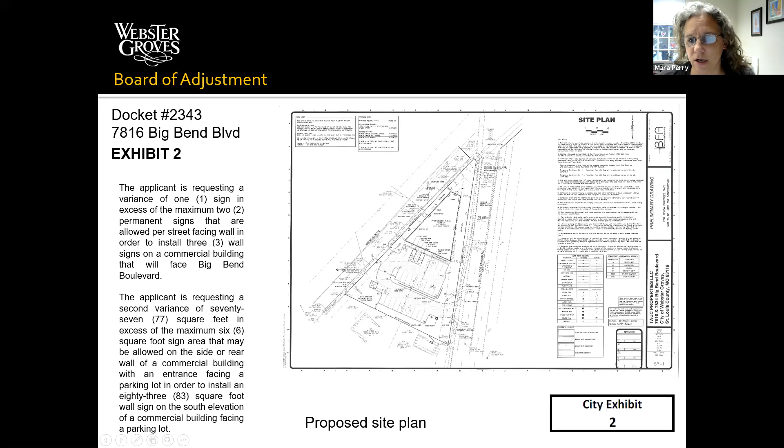And yeah, I think you've just done it again, but just for the board's review, there's actually 2 different variances requested in this application, is that correct? That is correct. We have both of the variances requested on the side of the slide: the first variance regarding the additional sign, and then the second variance regarding the additional square footage for another sign.

Thank you. At this time, Madam Chairman, the city would move the introduction of evidence, all the exhibits that have been testified to by Webster Groves, and have nothing further to present at this time.

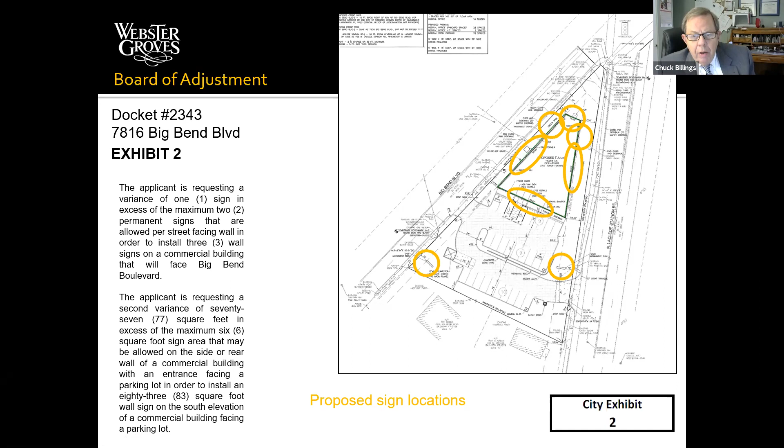No, that's incorrect. We gave you the generic one because you have to use the script over and over again, seven times. So I do need to go through all the description of the 2 variances that they're requesting. Please do.

So I'm going to describe for you this evening what the proposal is, what the proposed signs are, what we were able to approve in the code, and then I'll go through what they're requesting for the 2 variances.

Circled in yellow are all the proposed sign locations on this piece of property and on the building itself. As you go through the analysis of what they are allowed to have on the wall elevation, in this case both the north and west elevations, because there are only 2 frontages and because of the orientation of how the building faces, we consider the frontage of both the area of the wall that faces directly onto Big Bend, as well as the area of the wall that faces towards the intersection, as one facade. In looking at that as one facade, they are asking for a sign that faces the area that goes towards the corner of the primary part of the intersection.

They are also asking for 2 additional signs on the actual facade that is immediately parallel to Big Bend. In addition, on facade B, which is the facade that faces North Laclede Station Road, they are asking for 2 signs, which is what is allowed per the code, along the eastern elevation of the building. In addition, on facade C, which is the south elevation, this is the elevation of the building that faces internally to the parking lot on the property and faces towards what we would consider the side of the property.

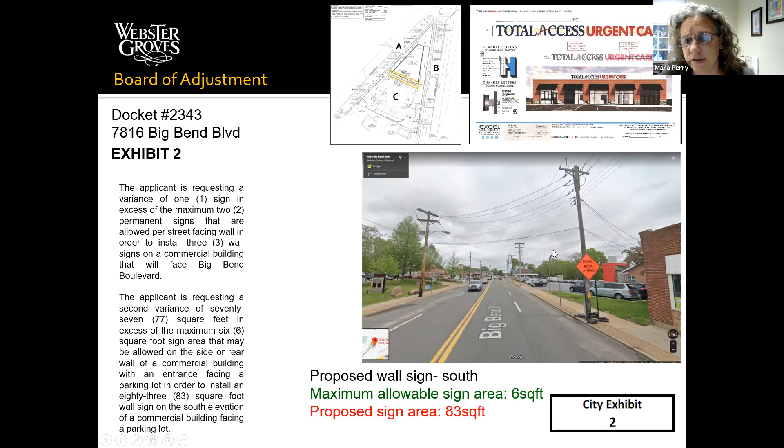This again is looking along the facade. This street view is along Big Bend, but from the back side, you would have a back-facing elevation that's a little bit closer in, not as far as this red area here. Both this structure and this brick structure have both been torn down. There will be a parallel elevation here that has 2 signs on it, and there will be a monument sign facing the street here.

We do not have any additional information to share with the board, but if there are questions regarding the request for those 2 separate variances, I would remind the board that each will be voted on separately. For each, you first have to determine if it's a practical difficulty or unnecessary hardship resulting in something inconsistent with the general purpose of the ordinance, whether for the 3rd sign facing one frontage, or the 77 additional square feet above the 6 square feet allowed. Once you make that determination, you also have to decide if that hardship or difficulty means the proposed sign will do any of the other 3 items listed on the screen. I am available to answer any questions.

All right, I turned my video off to save battery power. So what we're talking about is essentially 3 signs on the building and 2 monument signs. Actually, no — the proposal is 6 signs on the building and 2 monument signs. They are technically only allowed 5 signs on the building, and one of those is one of the variances they're asking for. Of the 5 signs allowed, one is limited to only 6 square feet, and they would like 83 square feet. Does that help with the clarification?

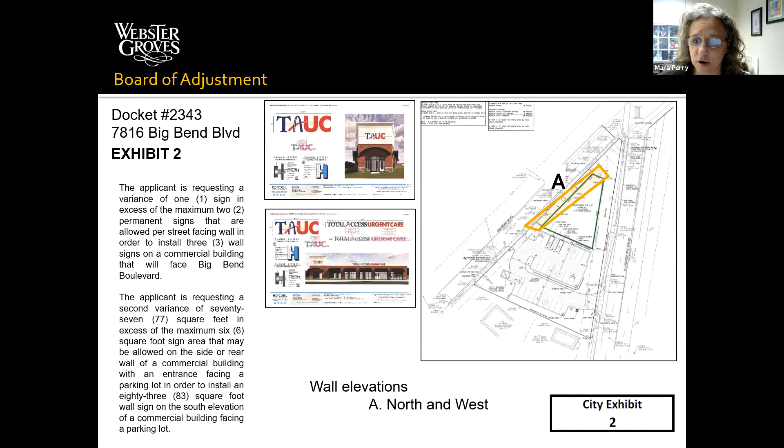That would be the question for the applicant. I can answer additional questions regarding what it meets or doesn't meet in the code, and our analysis of why we did not allow either of those. I would like the analysis, but if you want to wait till they present, I can ask afterward. Well, what's the question? I did go through the various analysis of what we did determine — that's why they're getting variances.

My question would be about that sign on the small wall. Basically you're considering it as 3 signs facing each of those streets because it's sort of oblique, so it can be viewed from the street as well as the ones that actually face the street. Technically there are only 2 streets, so there's not a third street to come into play, even though this is an unusual intersection. To determine which direction these facades faced, the building has 4 faces, but the intersection and lot only have 3 sides. Using those 3, we could have said the building faces Big Bend with 3 signs, or analyzed it as 3 signs facing Laclede Station. Either way, you're looking at 3 signs facing one street or the other — there's no third intersecting street, because only the 2 streets intersect with one another.

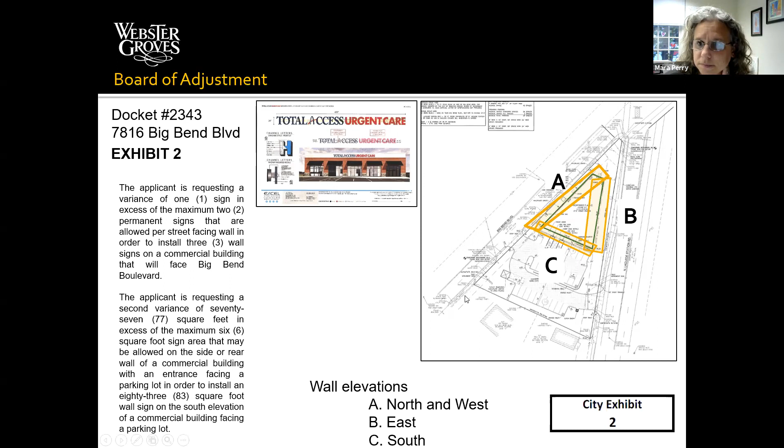Are there any more questions from the board for Mara at this time? No. If not, who is here in favor of docket 2343?

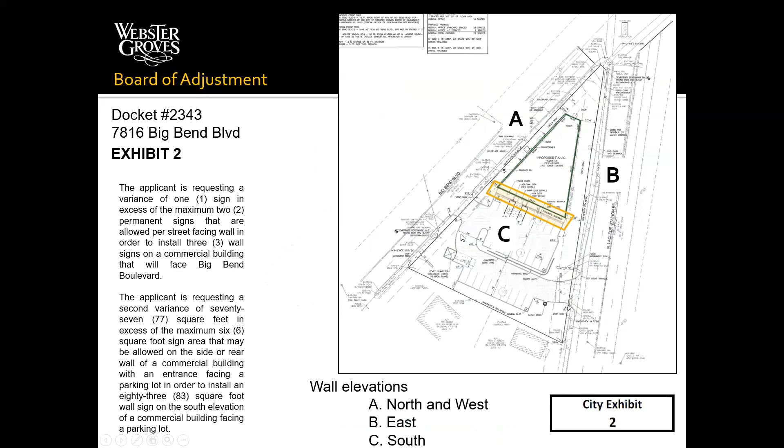As for the back of the building, the same premise applies. Given the nature of this building - thank you, Mara, you're reading my mind - as you're passing, going south to north on either angle, passing the building from the C side first as she's written up there, you have the opportunity to see those two monument signs.

But my concern is with the grading on the property. Those of you familiar with this area - and I imagine you're all similarly familiar, if not more familiar than me - the monument signs are at or actually below the level of the street. With this intersection having as much traffic as it does, there's potential for those signs to be obstructed by other cars.

With the building standing higher, that wall with the proposed sign - I think that wall is about 22 feet high - would provide a non-obstructive view, so it wouldn't actually make it worse for people driving there as far as sign clutter.

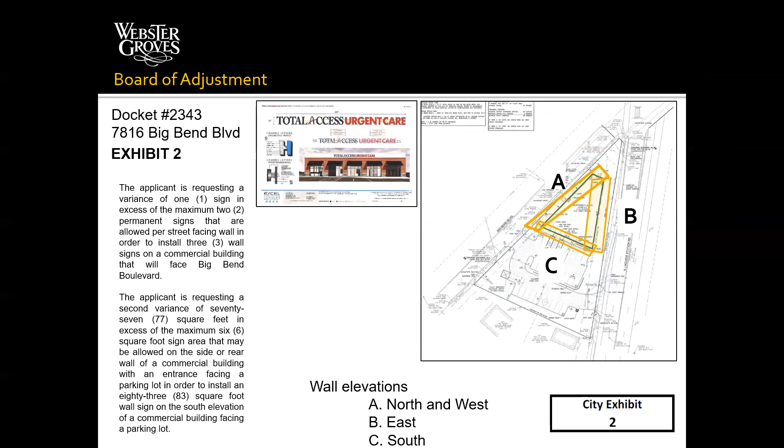Well, can we back up to that first picture of the actual intersection? Because it seems to me, yeah, that one - this one - even if you do have a sign, it's somewhat obstructed by all of those wires and poles going in. I'm not quite sure, are they planning on moving any of that? I mean, that all stays put.

I believe - Mara, you may know more about this from the city's perspective - that the county roadways is actually making an improvement on that corner. They may be removing one of those poles, though that's not from our project scope, but I believe there is some change occurring. From experience, when I've proposed removing as many wires as there are there, it typically ends up being $500,000, which is jaw dropping for everyone. But in any case, I'm hopeful, and I believe they're removing at least one of those, which opens up a bit of a signage window and would improve our visibility somewhat.

So Joe, I have a question for you related to this sign on the triangular facing, fascia of the building, at the peak there. If that sign was there, isn't it viewable from both angles of approach, both from Laclede Station and Big Bend?

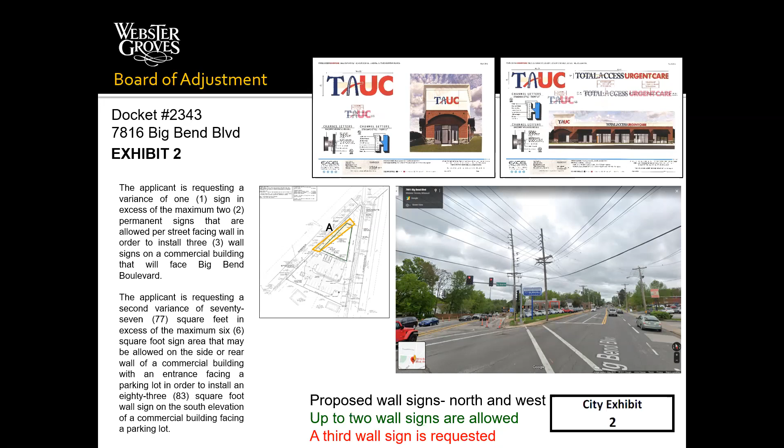Sure, and actually your point is well taken. I just want to make sure I'm following the appropriate cadence here. Maren, are you comfortable with where we stand right now? Sorry, we really need to get back to simply—you're making testimony, they're asking questions. Just for clarification, it's my understanding there will be time for board members to discuss amongst themselves after the testimony closes, is that correct? Correct. Once we go into executive session.

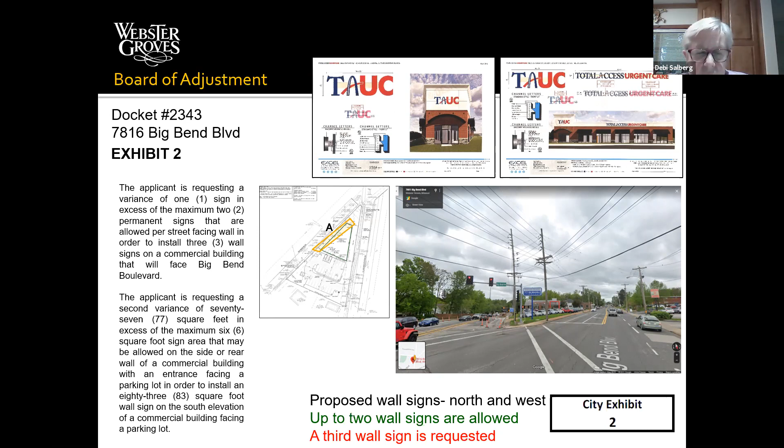So let's talk about the wall sign on side C, please. Sure, sounds great, thank you. All right, so in any case, our goal in making this one and in requesting this...

is to provide a more vertical option for when those monument signs are blocked by traffic or blocked by another car that might be sitting and waiting for the light. And so having that, as well as having branding over the front door to the building, which is closest to the parking lot where our patients are going to be, is effectively that.

And I'm concerned with the monument sign positioning. We couldn't find a better spot because closer to the intersection was continuing to further obstruct traffic and potentially line of sight. But with the grading of the site, I have some residual concern that those monument signs may not always be visible for people passing by and looking for that turn in. So the signs on the building offered a more elevated opportunity for them to see that without driving by and missing a sign. So I think that's all I have there.

So we can do whatever is next on the cadence here. Joe, thank you, I have a question for you.

Do you guys have data on basically the radius of the people that use your facility? I know the name of your facility, and there are several located within pretty decent proximity of this location. So I'm trying to figure out how far are people coming to access your location—are these generally local people, or are they traveling from somewhere they may not be familiar with the local area? That's a good question, because my answer has evolved since the last couple of years allowed us to expand farther into St. Louis. When it first started, people would drive 5 to 10 miles on the highway to get to us because we were further spread out.

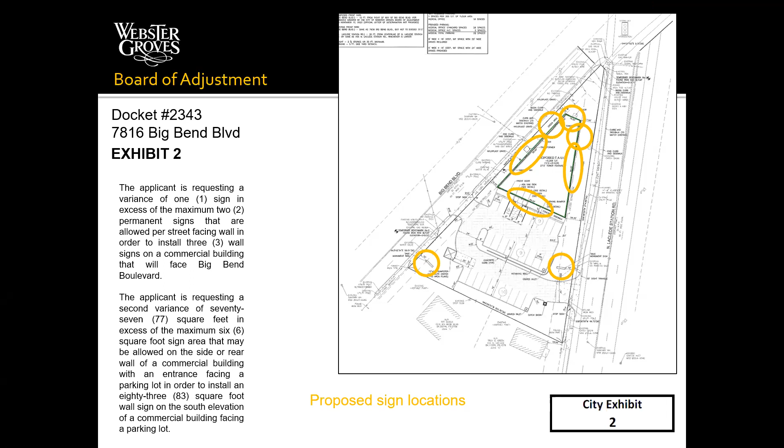Well, I would argue that there is a hardship. I think that lot is particularly unusual. Coming toward it on Big Bend, you can't see anything. If you're looking for an urgent care, I'd like to know where it is. I don't find it gaudy, and I don't think it's bumper stickerish at all. It's very reasonable to figure if that was a square building, there'd be a sign there. That doesn't bother me, I think that one makes sense. I have some issues with the back, but I understand their point clearly on the front of the building. So I'll give you maybe the corner, but I still don't think it's going to be as visible as you think. But when you put it all the way around the corners and throw in 6 other signs, it just seems like overkill. I guess that's where we're going to differ, and that's fine.

No, that's all right, I'm not mad about it or anything. No, nor am I. I just see it a little differently than you do, and I really do get your point. I take it, but I can also see the other viewpoint as well.

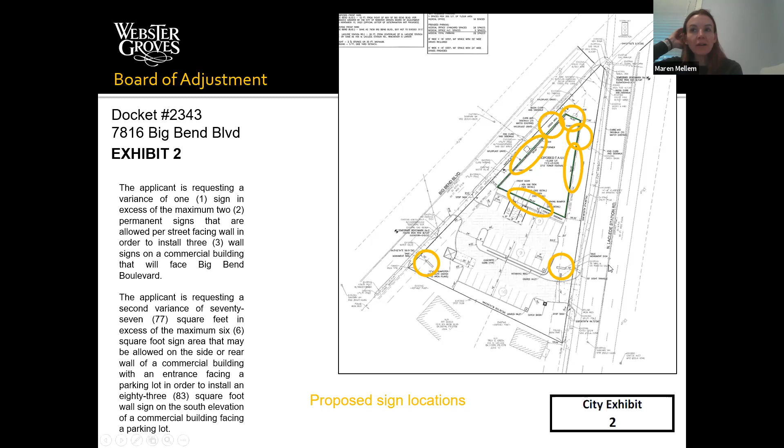Mark, can you flip to the standard of review again, please? The practical hardship. Thank you.

Me just being perfectly honest, I don't think there's any undue hardship on either one. Practical difficulties, unnecessary hardship, or results inconsistent with the general purpose of this ordinance, or the aesthetics or the intent of the building.

In the interest of time, since we have 6 more of these, does anybody else have any comments? Anyone have any comments on the sign on side C that they haven't mentioned? I'd like somebody to at least address some of that undue hardship, just so we have it on record. Whatever the vote turns out to be is fine.

I mean, do we need to talk about them separately or can I combine them? We'll have to vote on them separately, but you can talk about them together, that's fine.

I guess I'm leaning towards, I could see how it's not their preference or not ideal for marketing and branding purposes, but I don't see it being a practical difficulty or unnecessary hardship. There seem to be more than enough signs to adequately cue eyes into seeing the space. We heard testimony that their average patient is coming from within a few miles, so it's more than likely a person who passes that intersection and is very familiar with where they're going. It's unlikely to be someone just driving down the street looking for an urgent care, since they're within a few miles. I don't see that they're helping their patients that much with it. I guess that's where I'm leaning.

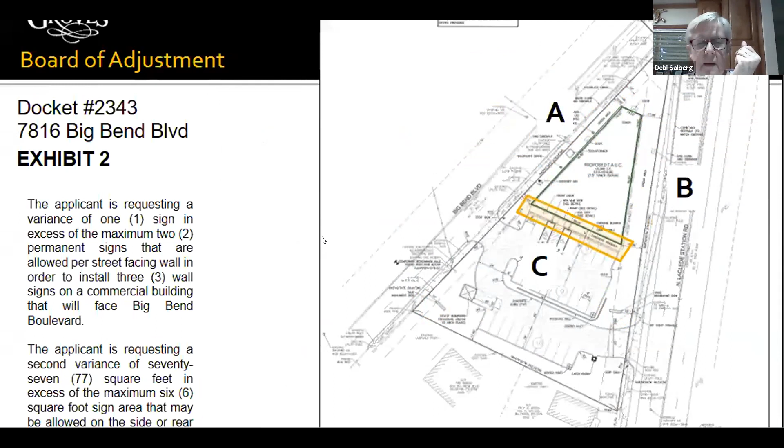This is docket number 2344, a petition submitted by Donald and Deborah Fitzgerald for an application for variance from section 53196B of the zoning code of the city of Webster Groves. The applicant is requesting a variance of 2 feet in excess of the maximum 4-foot fence height allowed in a front yard in order to install a 6-foot tall fence of approximately 20 linear feet located in the north front yard of the subject property. The property is located at 901 South Gore Avenue within the A3 10,000 square foot residence district.

And Chuck, would you like to present the exhibits? Does the city have a case? Yes, Madam Chairman. At this time, the city would move the introduction to evidence of the exhibits which have previously been provided to the board. They are numbered 1 through 10, and some of them have separate parts. With that being said, I would move the introduction to evidence of all the city's exhibits and would present the testimony from the city staff.

And we will start with, would you please state your name for the record, Danny? Do I need to be sworn in first? Yes, Danny. Yes, would you please raise your right hand? Sure. Do you solemnly swear that the testimony you're about to give is the truth, the whole truth, and nothing but the truth? I do. Thank you. Please go ahead, Mr. Billings. Thank you. Would you state your name for the record, please? Danny Gendusa. And you are employed by the city of Webster Groves, is that correct? Yes, I am. And in what capacity are you employed? As planner. What are your duties in that position? To administer and execute zoning regulations.

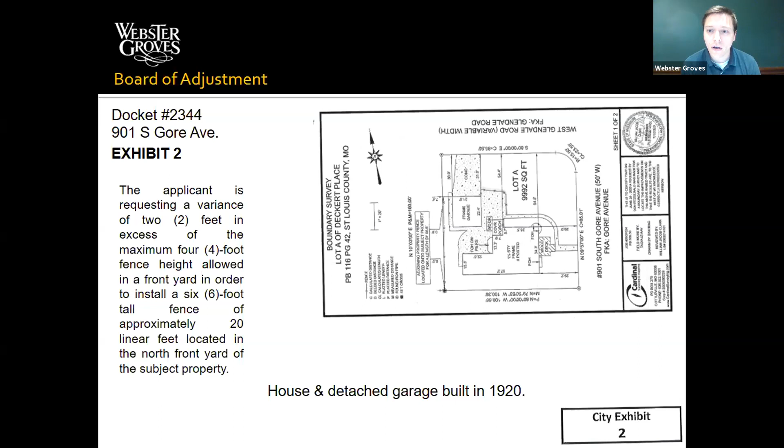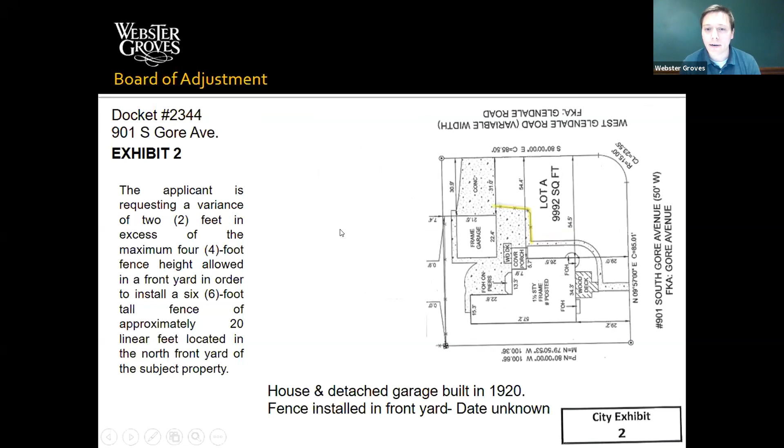Can you describe the existing conditions on the property? Yes, so 901 South Gore Avenue is a corner lot. It is located at the corner of South Gore and West Glendale Road. The house and the detached garage were built in 1920. There was a 6-foot tall fence installed in the front yard, kind of highlighted in yellow on the slide. The date of its installation is unknown. We don't have a permit record for it, or I was not able to find one.

Okay, do you have further exhibits to present, Mr. Gendusa? Yes, so the applicant has been doing a number of other home renovations, and at this point they're wanting to replace that fence that was hit by a drunk driver. They applied for a fence permit to install a 6-foot tall panel style fence, a different style than what they had before. Staff told them, unfortunately, we couldn't approve it because you are not allowed to have a 6-foot tall fence in your front yard.

But we told them that there actually is a code exception that would allow limited fence repair if you're looking to do the same material at the same height and in the same location as the existing fence. It can be deemed a repair according to our code and can be done without a permit. So even though we couldn't approve their 6-foot tall fence in a different style, we could technically approve them to replace it with the same kind of 6-foot tall wood shadow box style that they had previously.

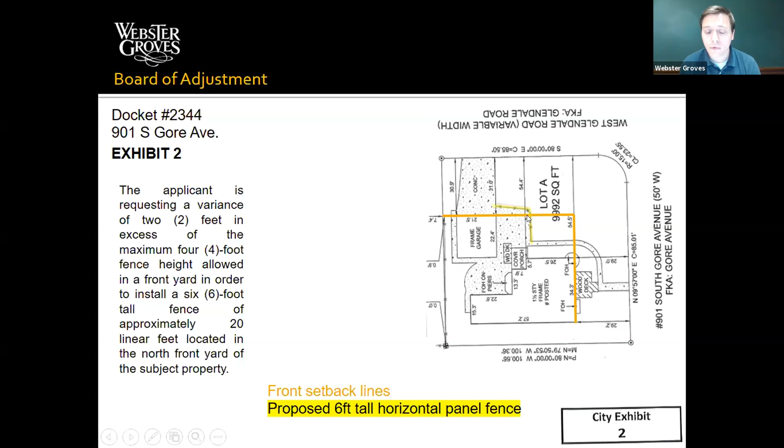And this is the type of fence that they wanted to install, different from their shadow box style — it's a horizontal panel style. I don't want to confuse it too much, but if the Board of Adjustment were to approve the applicant to have a 6-foot tall fence of a different style, this style would still have to go to the Architectural Review Board for a separate approval. But this is the style that the applicant would like to put in.

And as the slide shows, any new fence other than the 6-foot shadow box they previously had, located north of the front setback line, would have a maximum height of 4 feet. And any fence that they would install in line with or behind the front setback line could be allowed at 6 feet in height.

That's the sum of it. I know it's a little bit of a unique request, so I'd be glad to take questions.

Any questions from the board at this point? At this time, Madam Chairman, the city would introduce into evidence each of the exhibits that has been presented to the board through its packet and as testified to by the city. With that said, the city would have nothing further to present on this application. Is there the applicant available to speak?

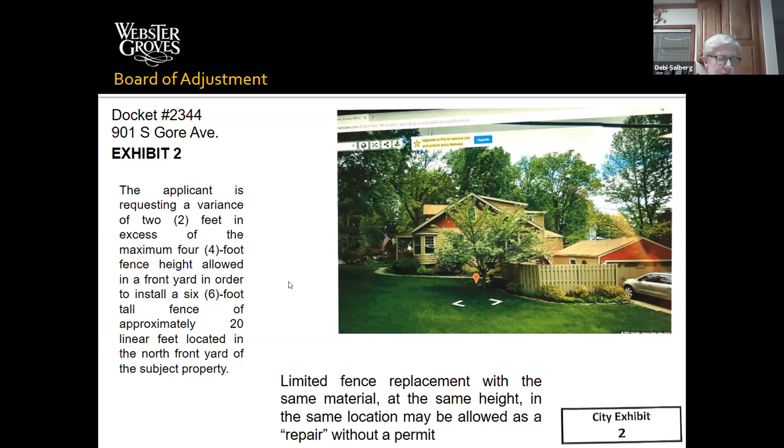Is there any other board member questions on this petition? If not, are there any members in the audience who would like to speak in favor of docket 2344? Are there any members of the public who'd like to speak in opposition to docket 2344? Hearing none and seeing none, we'll close the public session and open for board discussion.

Well, I'll start out. I think it's sort of difficult to find an exceptional topographical or other extraordinary condition, other than the fact that they did pour the patio beyond the front yard. I do understand the request for the variance—they just want to put it back the way it was for many years. While I'm inclined to approve it, I'm not quite sure what the hardship is.

Well, looking at the exact language here, you bring up a fair question, because it's not by reason of exceptional narrowness, shallowness, or shape, or exceptional topographical conditions or other extraordinary situation. I guess that all still relates to a condition or specific piece of property. If the patio was extended before they were trying to do this fence, if that's where it was to begin with, I think that does fall into that exception.

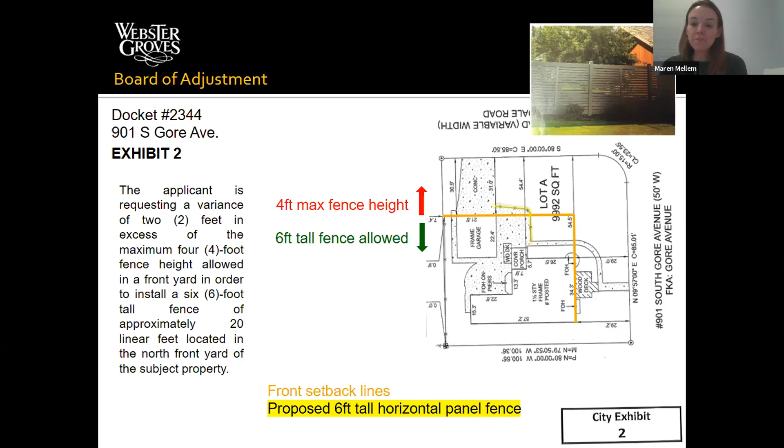Your application has been approved. You may see city staff during regular business hours about your next step.

Thank you very much. Maren, would you please read docket 2345? This is docket number 2345, a petition submitted by James Hotop on behalf of Daniel and Cheney Hageman for an application for variance from section 58J of the zoning code of the city of Webster Groves. The applicant is requesting a variance of 5 feet from the required 10-foot north side yard setback in order to construct an accessory structure, a detached garage, located 5 feet from the north side property line. Property is located at 325 South Maple Avenue within the A2 15,000 square foot residence district.

Does the city have a case? Hang on, can I just correct that? That was section 53.058J. Oh, sorry, did I misspeak? No, thank you, it's okay. It's easy to overlook.

Madam Chairman, at this point the city would move the introduction of evidence, what has been previously marked as exhibits 1 through 9, with some subparts that have been previously provided to the board in their packets, and in the supplement to the exhibits would present the testimony of Danny Genduza.

Danny, would you please raise your right hand? Do you hereby affirm under penalty of perjury that the testimony you're about to give is the truth, the whole truth, and nothing but the truth? I do. Thank you.

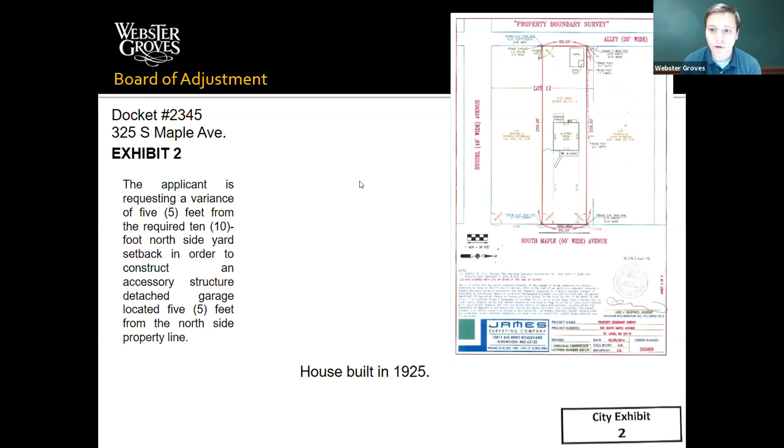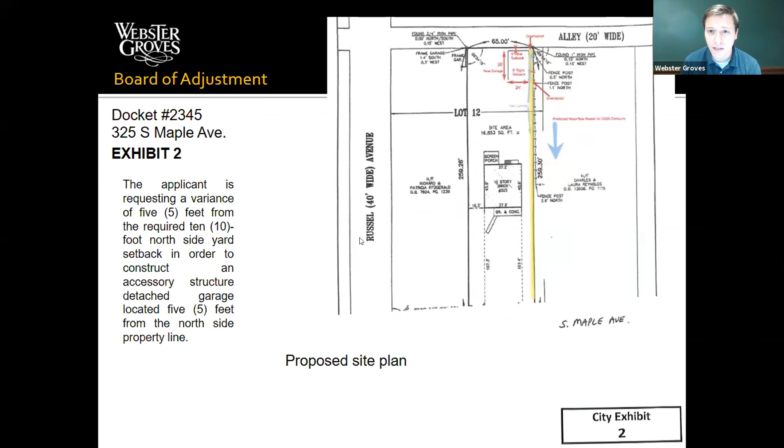Okay, and so explain in short detail the actual variance being requested by this applicant. The applicant is seeking to build a 3-car detached garage that would be 864 square feet. Because they would like to build this large accessory structure, it would need to be at least 10 feet from the property line. If they were to construct a smaller accessory structure, it could be allowed at 5 feet from the side property line. Shown above is the applicant's proposed preliminary site plan.

The box marked in green shows the available buildable area allowed by zoning that a detached accessory structure could be built. If they are wanting to do a large accessory structure, it would need to be at least 10 feet from the side property lines.

Shown in red is the applicant's requested location for their 3-car detached garage. It'd be 864 square feet. They would like to put it 5 feet from the side property line. And here's the proposed floor plan and preliminary elevations for their garage.

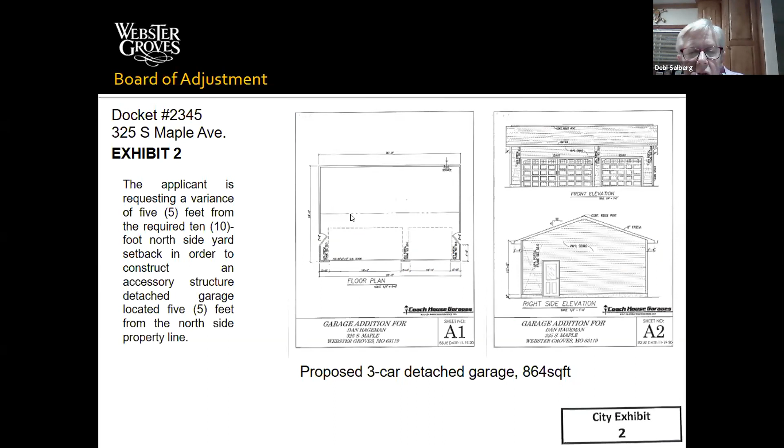That is all that I have. Danny, can you tell me where will people be entering? Will they come off the alley and enter there? So on the left, it'll be a side entry garage. They would pull in from the alley and from the side in order to access the garage. If the structure were to be 10 feet from the side property line, it would still technically have the minimum required space to access the garage.

Any other exhibits that you have to present to the board at this time? Danny, do you have any other slides to present to the board? I do not. Okay, at this time, Madam Chairman, we would move the introduction to evidence of the exhibits and the testimony of the city, and the city would have nothing further at this time. Does anyone have any questions for Danny before we ask the applicant to join us?

Okay, who's here in favor of docket 2345? I know I saw the contractor on earlier. Yeah, I see the contractor on, but he hasn't raised his hand, and I see the homeowner on. Okay, I'm going to allow the owner to talk first.

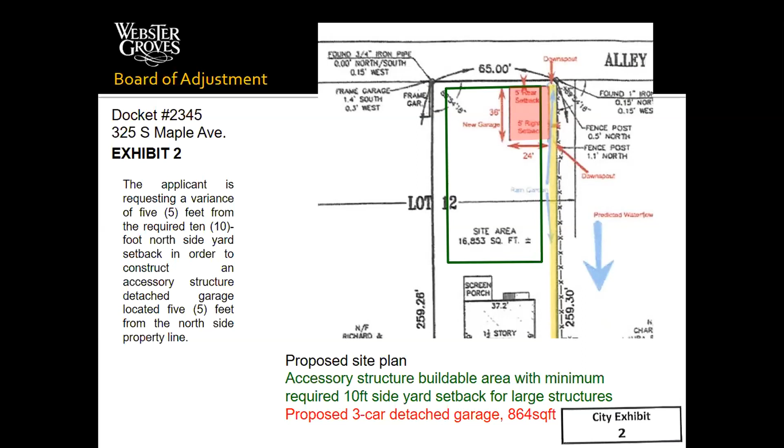Is there a required setback for what their drive surface would be, if they paved that area back there? Yes. So the minimum driveway depth required is 22 feet. That's a very standard depth in commercial parking lots backing out of a 90-degree parking space. They would actually have 31 feet, if they were 10 feet from the property line between the garage and the south side property line. So it would be 9 feet more than what is typical in a parking lot.

There would also be an opportunity to have additional surface parking spaces on the side of the garage. If they're not enclosed, they can still have a parking pad on the side of the garage.

Danny, my question was more of, are they limited in how far they can extend their driveway to the south? Oh, there's no minimum setback that the driveway or hardscaping has to be from a property line. So the driveway could extend to the south property line. So they could have that full 31 feet to back out, make a right or left turn and enter the alley, correct, kind of the same way approaching on the way in, enter the far south edge of the drive and then turn into the garage. Okay, thank you. The driveway could also be extended further to allow additional turnaround area.

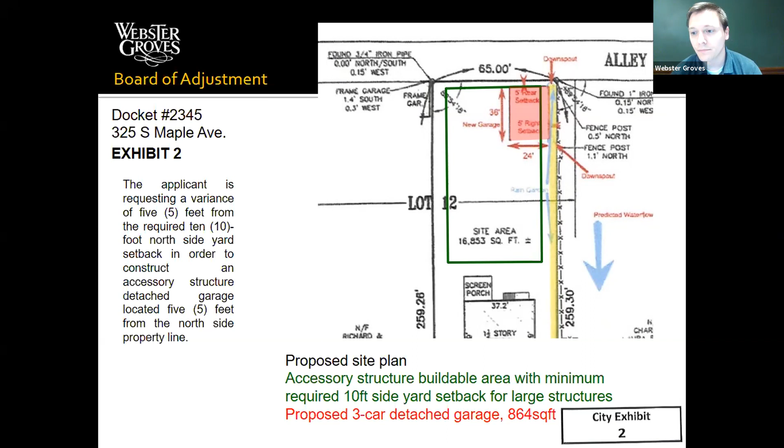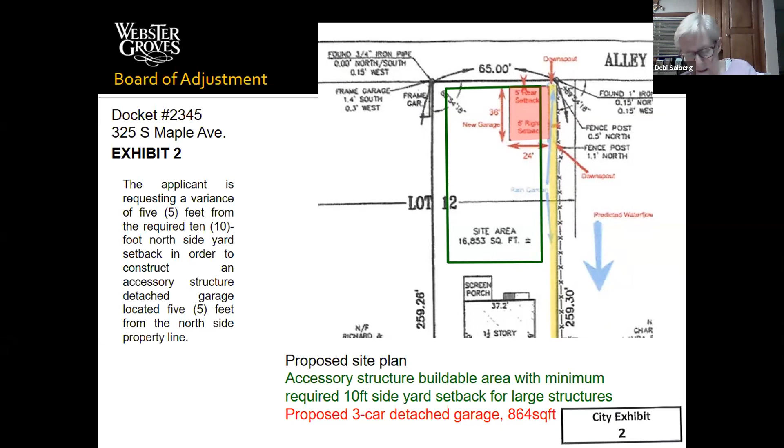Does anyone else have any questions for the petitioner? Are there any other parties in favor of docket number 2345 this evening? Are there any individuals opposed to docket number 2345? No. Hearing none and seeing none, the board will close the public session and move for board discussion.

Thank you. Does anyone have any comments on this request? I am honestly inclined to approve it. It doesn't seem like it hurts anybody anywhere, and it does seem like it will help keep traffic off the street, which I think is probably a good thing. I also think this is a very long, narrow lot, and possibly you could argue that being on an alley is a hardship because that's not something prevalent in the city, while there are certain areas that are on alleys. And I think this does give... I'm assuming there's no problem with the size of the garage, or that would have come before this board as well. So I think this is a reasonable request.

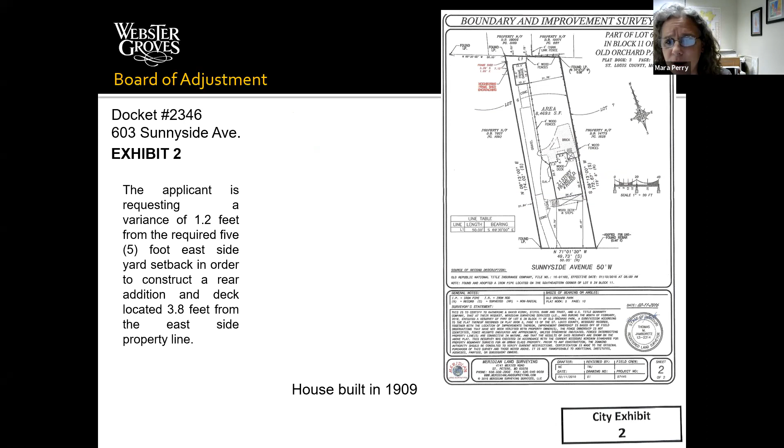Could you describe the existing conditions on this parcel of property? Yes, so the existing conditions of the property, the house was built in 1909, prior to the zoning code. The structure was built, as you can see, quite close to the side property line. Due to the fact that this lot is 50 feet in width, it gives the exception that they can do 10% of that lot width versus the standard 6-foot side yard in the A4 zoning district. So that does reduce the setback to only 5 feet. However, the current structure is closer than that to the property line.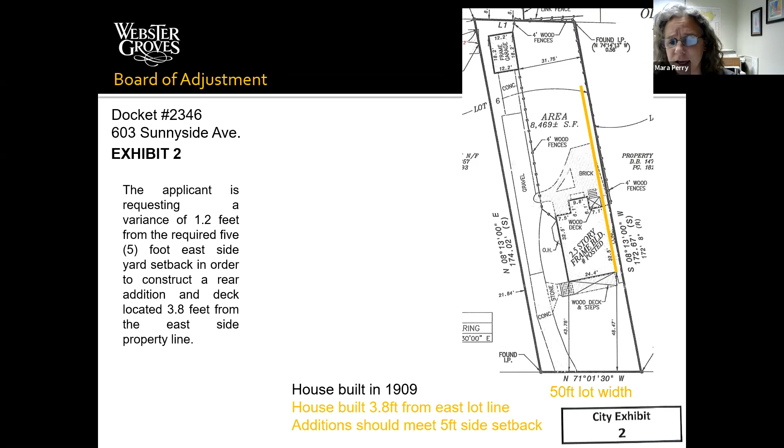And would you describe for the board the actual variance that's being requested by this applicant? Yes, so as you can see here marked in yellow, the house was built 3.8 feet from the east lot line. Additions to the structure are required to meet that 10% of the lot width, which would mean it having to be 5 feet from the side setback. You can see photos of the house that were in your packet, the existing structure, and the location of that structure on the lot. In addition, there is a proposed site plan.

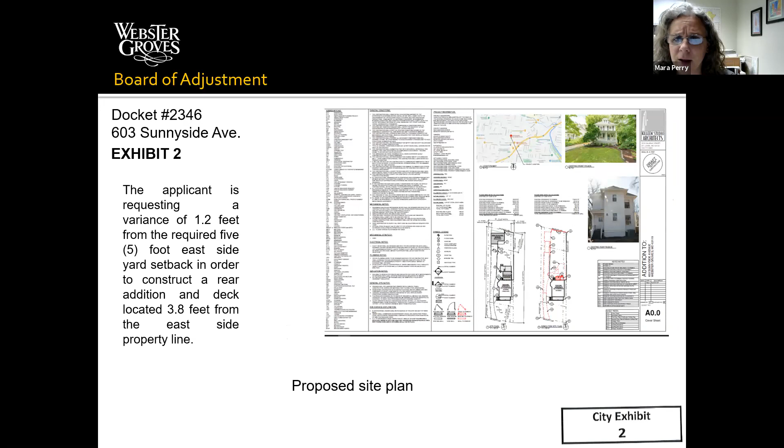I'm going to get into a little more detail in regards to the proposed site plan. The buildable area is identified in a dark green line, which shows the 5-foot side yard setback on the one side where the existing structure is, a 6-foot side yard setback on the other side due to the fact that there is no structure too close.

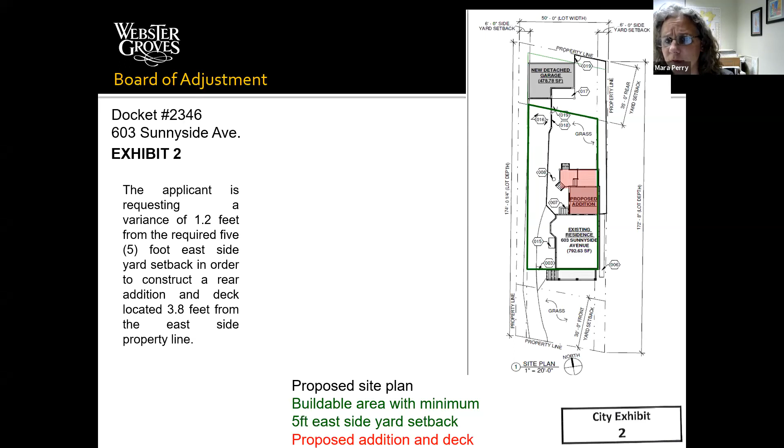And then you can see the front, which is the existing front of the house, and then the rear yard setback and the buildable area that they have. The red is the addition that is proposed onto the structure, building off of the back of the house, and then doing a deck off of the back of that proposed addition.

One thing to point out, it's identified here where it would need to be for the 5-foot side yard setback, and identified closer where the addition is. You'll note the 007 identification, which is kind of in the middle at the back of the house. That is a set of stairs that accesses the basement level of the structure, and there is obviously some head height that needs to be met.

So pushing the structure farther to meet the 5-foot side yard setback does encroach upon some of the existing portion of the structure in terms of access to the rear of the structure.

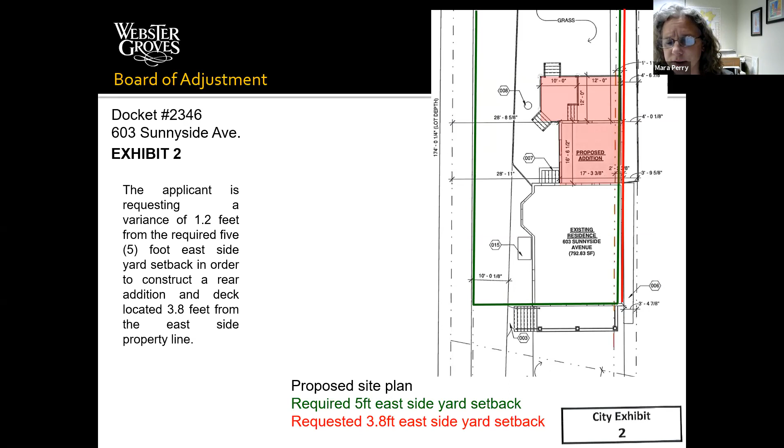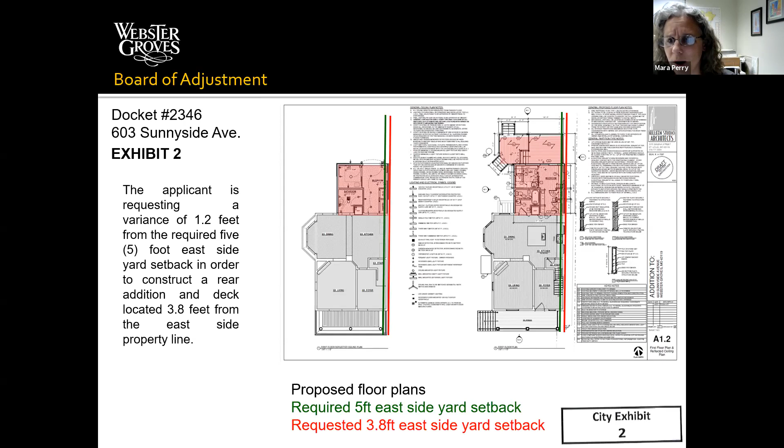So you can see in red the requested 3.8-foot east side yard setback, in green the 5-foot required side yard setback. There is a set of proposed floor plans, which again further identify where the structure is going, as well as show the existing stairs, the proposed addition and deck, both the first floor and the second floor. This is the identification of where the required setback is in relationship to the requested setback.

Elevations that you can see here, again identifying the rear of the structure and the stairs that are taken into account in regards to the existing structure.

And Mara, this addition lines up with the existing house, correct? That is correct. It's intended to line up with the existing location of the house in relationship to the side property line. Thank you very much.

Does anyone have any questions, any other questions for Mara?

Nothing further here on behalf of the city, Madam Chairman. Okay, thank you very much.

Does anyone have, who's here in favor of docket number 2346?

I'm allowing the architect to be able to speak. Yep, that's me.

Ms. Halsey, would you please raise your right hand? Do you solemnly swear that the testimony you're about to give is the truth, the whole truth, and nothing but the truth? I do. Thank you very much.

Please go ahead. Okay. Hello, everybody. My name is Lee Halsey. I am the project manager at Killeen Studio that has been working with the Scott family on this design. I don't want to repeat a lot of the stuff Mara said, but she did mention that the existing residence was built in 1909 before the current zoning laws were in effect.

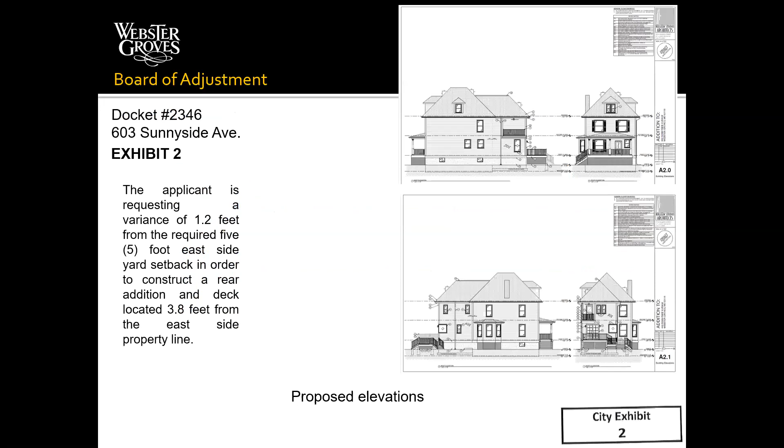The house currently only has 1.5 baths. Upstairs, they're looking to add some office space because they both work at home. So it's not a huge, crazy addition—it's rather modest, actually. But unfortunately, this is the only place it can go. So our hardship is the fact that the rules changed. Thank you for considering this.

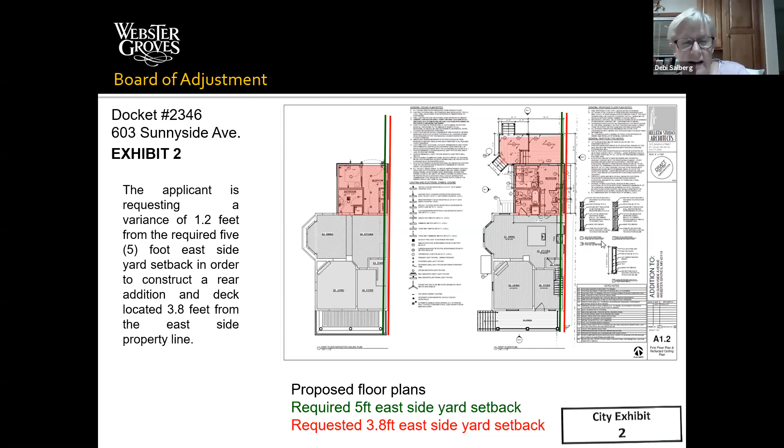Thank you. Are there any board members who have questions for this witness? Are there any other witnesses in favor of docket number 2346? No hands up. Are there any parties opposed to docket number 2346? Also no. Seeing none and hearing none, we'll move into executive session.

We'll close the public session and open for board discussion. The hardship seems to be that they built the house 100 years ago closer to the property line than we would have liked. I think they've attempted to work within the confines of what they have with the existing house, and it's a reasonable addition. So I'd be inclined to approve this.

Does anyone else have any comments? Yeah, Debbie, I think I'd add that the stairwell to the basement restricts their ability to create the living space they're looking for, by shifting that addition as well. So they're kind of hemmed in on both sides. Right, good point. Anyone else? Randy? No, I just think it's a well-considered addition.

Well, if no one has any other comments, the chair will entertain a motion to approve docket number 2346. I move. I'll make a motion to approve. So we have Randy moving. I'll second that. Andrew. Okay, Andrew moving and Randy seconding.

All in favor, say aye. Aye. Aye. All opposed, say no. Mara, would you poll the board? Randy Sprague, aye. Debi Salberg, aye. Andrew Potthast? BJ Papillo? BJ? BJ, did you vote? Aye.

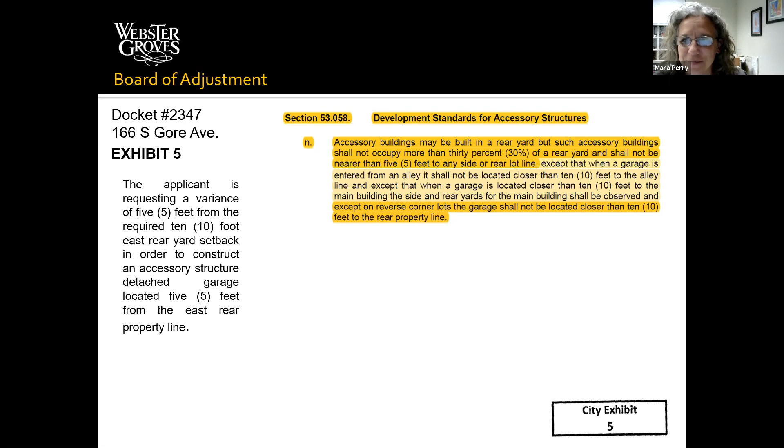It was approved, could we have the next slide please? Sorry for this, sorry, BJ locked himself out of his office and now doesn't have his keys. So he's now entering in. That was our whole issue. So we have him in now. Hold on a second, I will move the slides. Which one are you on now? You're on the right slide.

So the house and the existing detached garage were built in 1915, before the modern zoning codes. There is an existing detached garage built at the rear of the property, located only a couple of feet from the side and rear property lines. It was approved for demolition recently. The applicant is seeking to construct a new detached garage at the rear of the property.

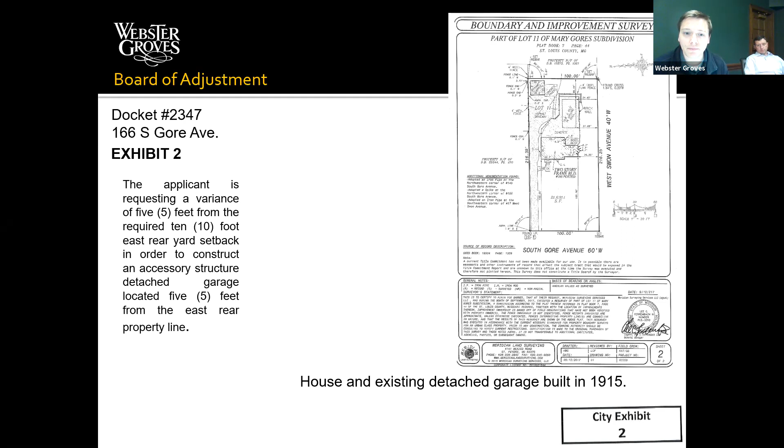And would you explain for the board the variance that is requested? If we could go to the next slide showing the site plan, and then on the next slide, the proposed detached garage is marked in red. The applicant is also seeking to construct an addition on the rear of their home with a screened-in porch that would be located approximately 25 feet from the proposed structure as shown.

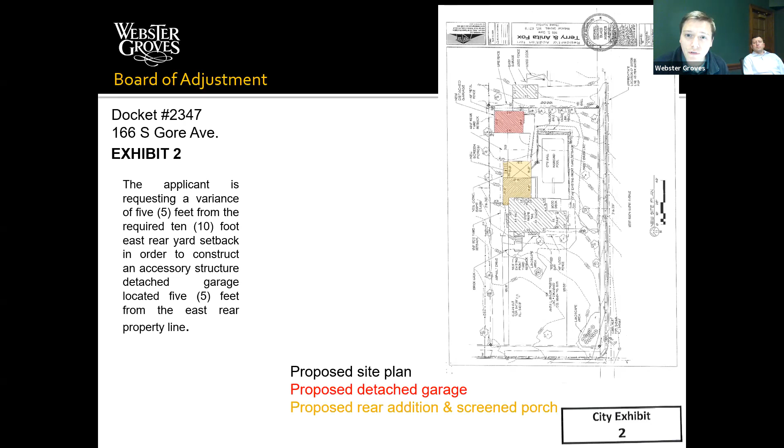If it would be located 5 feet from the rear property line, if it would be required to be pushed forward 10 feet from the rear property line, it would be located 20 feet from the proposed addition they would like to build. The code requirement requires a minimum 10-foot setback. The applicant is looking to build it 5 feet from the rear property line.

And I would let them make their case for a hardship. That is all that I have.

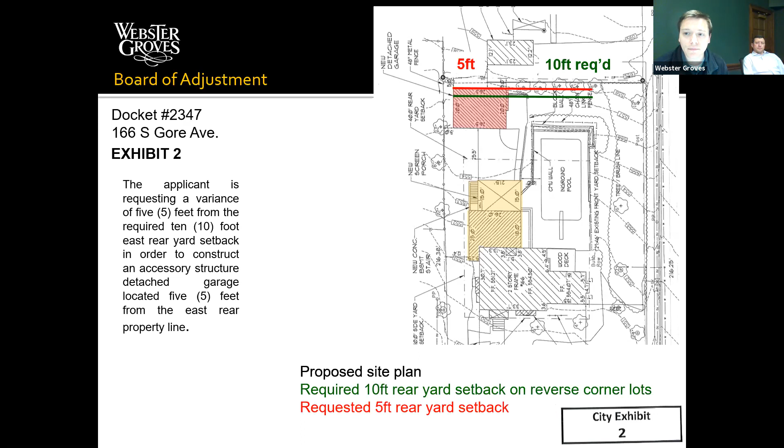Mr. Ginduza, are there any other exhibits that you have to provide to the board at this point? I do not. At this time, Madam Chairman, we move the introduction into evidence of all the exhibits that have been testified regarding and included in the packet, and the city would have nothing further to present at this time. Thank you. Do any of the board members have any questions for Mr. Ginduza before we bring the petitioner on?

Who is here in favor of docket 2347?

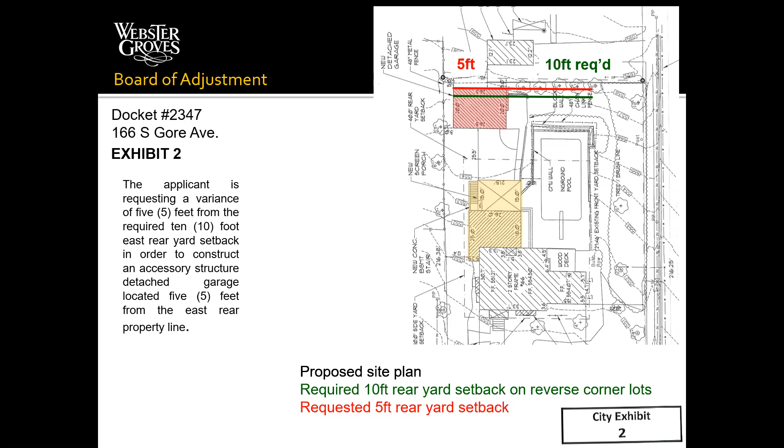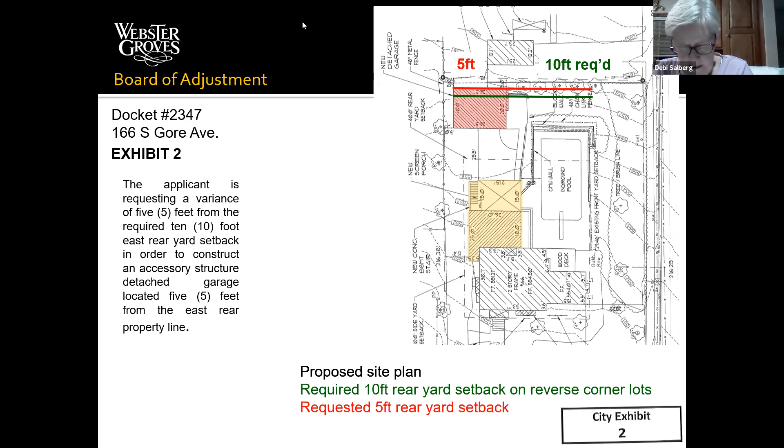Thank you. Anyone else have any questions for Ben? If not, are there any other witnesses in favor of docket 2347? Are there any parties opposed to docket 2347? Seeing none and hearing none, we'll close the public session and open this for board discussion.

Does anyone have any comments? Come on, Randy, start the discussion. I think they've done a reasonable job here. They've moved the garage a bit further away. Given the fact that they have a pool that's going to cause problems for them, they're adding no retaining walls, which I think is very important. I think this is a pretty good compromise, and I would be in favor of it.

I'm not sure this is exactly right, but I think one of the hardships to other options is the difference in grade between this and the other street, so they can't do the garage the other way. Correct, I would agree with that very much. Yes, and I tried, and it doesn't really work.

Does anyone else have any comments? Okay, the chair will entertain a motion to approve docket 2347. I would move approval of docket 2347. A second. Okay, we have a motion and a second. All in favor, say aye. Aye, aye, aye. All opposed, nay.

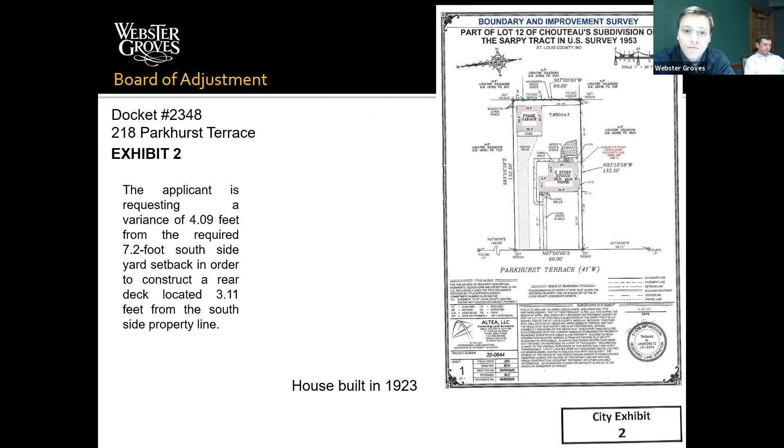This side yard setback also applies, in addition to any additions, to proposed decks as well. The existing house was built in 1923, built 3.11 feet from the south side property line. The applicant is looking to extend the deck following the existing building line of the house.

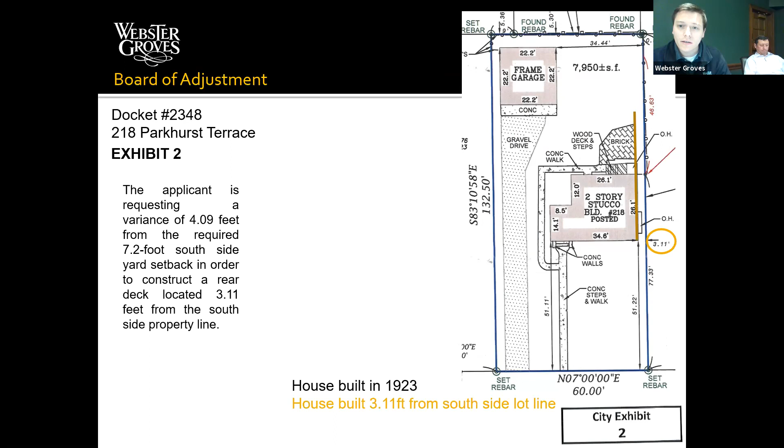And is there anything further you wish to describe for the board as to the existing conditions on this property? Yes. Next slide, please. So in fall 2020, the applicant removed what was a rear pantry and an exterior staircase, shown in the photo to the left. They removed these structures during kitchen renovations through a building permit that was approved through the city.

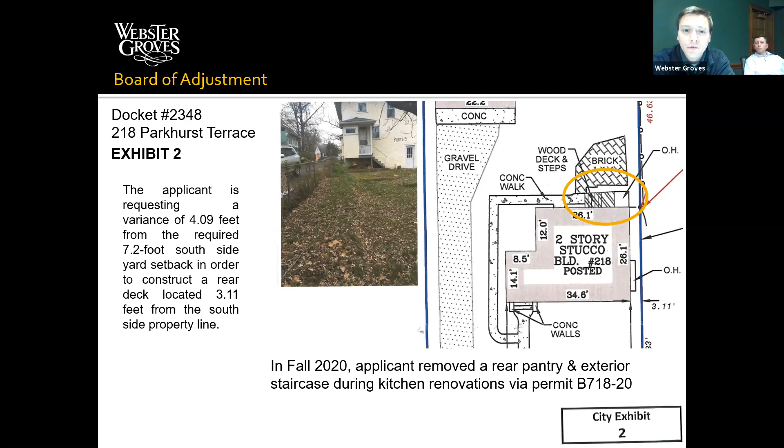Looking at the next slide, you can see the copy of the floor plans that were approved for building permit B718-20. On the next slide, we can see that the rear pantry and the rear staircase that had been there were approved to be demolished. The applicant at that time presented a new rear landing and exterior staircase to exit the kitchen. They were approved to reframe the rear door out of the kitchen and approved to construct their rear landing and exterior staircase that could meet the minimum required 7.2 foot setback from the south side lot line.

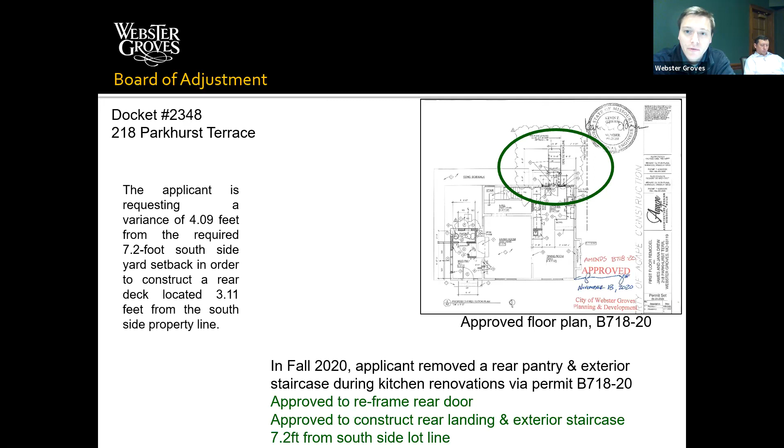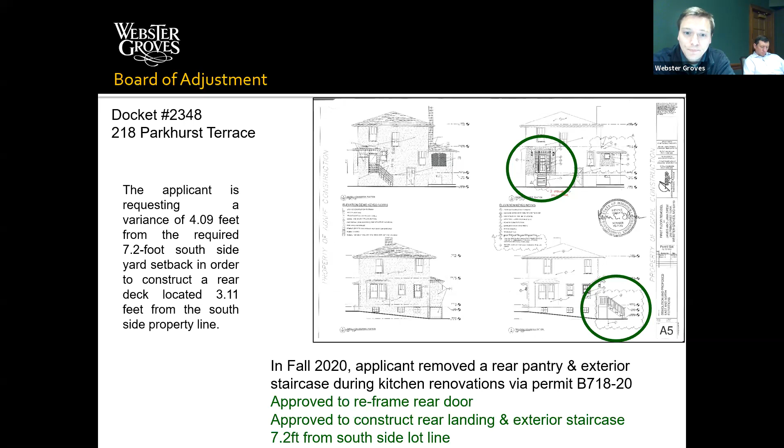Here, faintly, you can see the approved elevations by the city, showing the simple 3-foot landing out of the rear entry door and the straight staircase out of the home. Here's some zoomed in photos of the elevations. The applicant at that time removed the pantry and the staircase, and reframed their rear doorway, but did not construct the rear landing and staircase at that time.

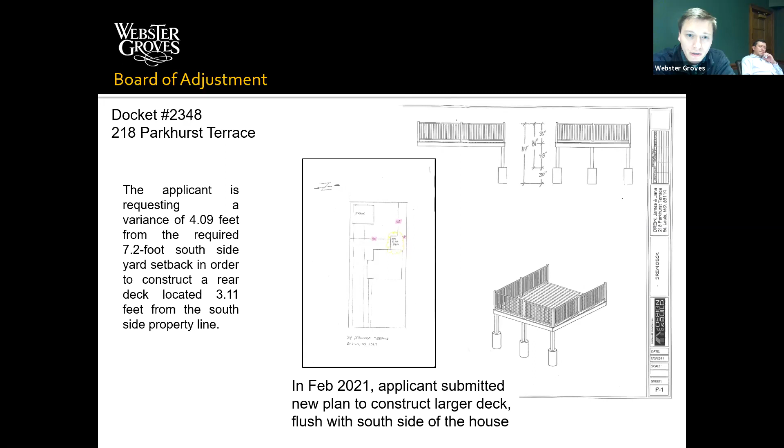And then recently in February of 2021, the applicant submitted a new plan to construct a larger deck, different from what was previously approved. This new deck would be flush with the south side of the house. Shown very faintly, you can see the proposed elevations of the, I think it's a 12 by 14 deck that would be flush from the side of the house. On the site plan, we can see the proposed footprint of the larger, wider deck marked in red.

Another factor: the proposed deck that the applicants would want to build would be 48 inches above grade. At that height, the deck would be required to meet the setbacks required of the main house at 7.2 feet. If the applicant were to reduce the deck height to no more than 36 inches above grade, it would be allowed to extend as close as 3 feet from the south side property line.

So if they were to reduce the height of the deck, they could build it in line with the house as they've expressed in their second site plan, without a variance.

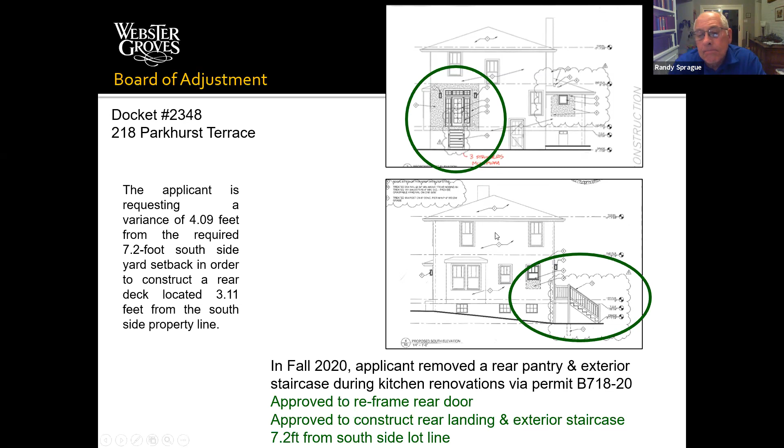I understand, thank you. Danny, it's been a while since I went through the whole packet. Is this deck an egress? I mean, will it have steps down to the ground as well?

I don't know if Mara knows. Okay, well I'll rest assured that the building commissioner will not approve anything that doesn't meet code, so I won't worry about that right now.

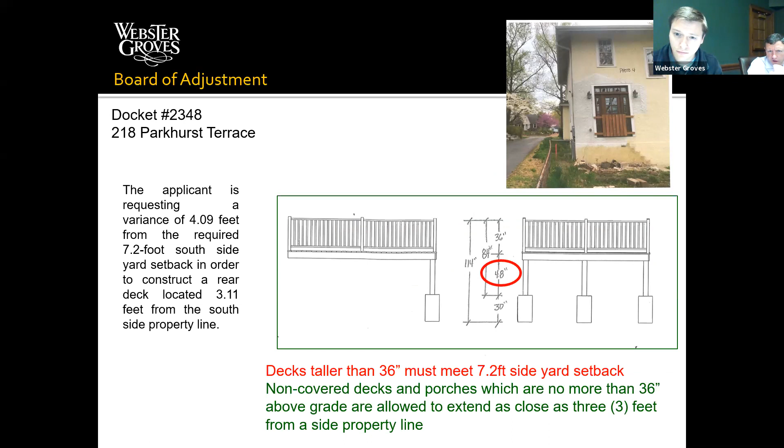Sure, anyone else have any questions? I thought I saw questions — there's a doorway to the bottom on the other side of the house. Maybe I was confused. Okay, you're probably right, BJ, I just missed that. Oh yeah, I see it — another egress from the bottom side. All right.

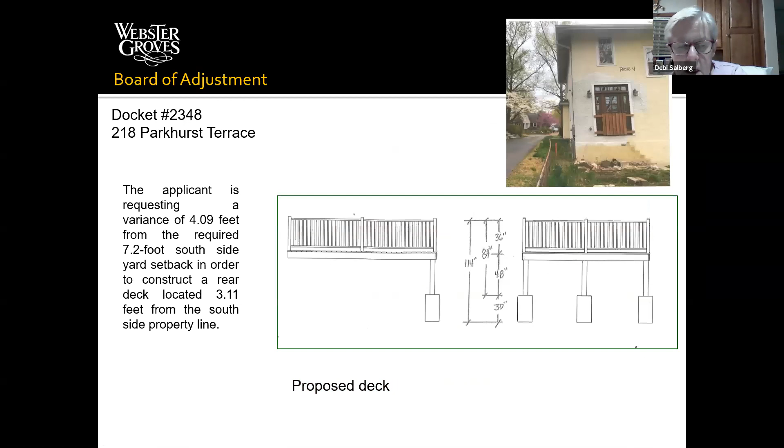Does anyone else have any questions for Mr. Jandusa? If not, who is in favor of docket number 2348?

I don't have any. Oh, there we go. Hold on a second.

Is this Mrs. Drew? Yes, it is. Would you please raise your right hand? Do you solemnly swear that the testimony you're about to give is the truth, the whole truth, and nothing but the truth? Yes. Thank you very much, please go ahead.

So I'm glad you found the other back door there. We do have another way into the back of the house, or out of the back of the house.

To clarify about where the 7.2 foot difference lies, it unfortunately hits right in the middle of the side light, and that's part of the concern in terms of not being able to stretch the deck over that far in terms of where it lines up against the back of the house.

So just to make sure I'm understanding right, sorry to interrupt — the deck will be basically flush with the house, correct? That is what we're proposing, yes.

So a big part of the concern is the required 7.2 foot side yard. But I was thinking about this in a flipped way. My concern is how we get out of the back door and onto this deck, and that if it's a certain height, it doesn't have to be quite so far away from the property line. So can we please build this deck level with the back door rather than having steps down onto a deck? Right now we don't really see a way to build it farther over between the other back door and the placement of the new back door. We have a limited spot to put this.

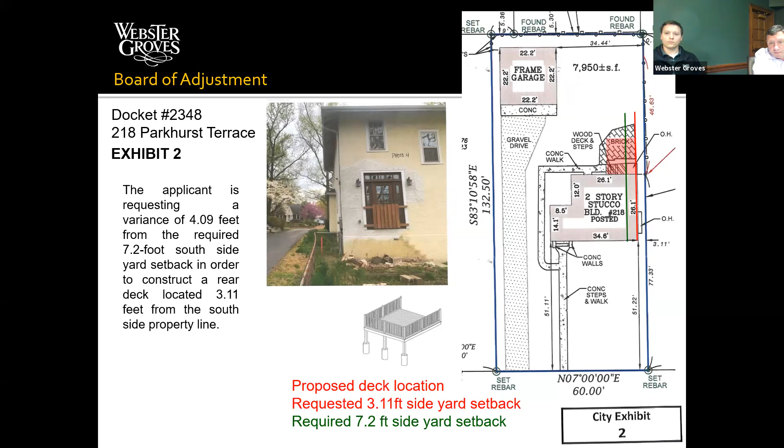True. Well, I will also say it seems odd to me that we have to go down, but I'm not sure quite what that regulation is. If you go down to 36 inches, you can do it the same way you're going to do it if you keep it flush. It just seems much more reasonable to stay flush with the door coming out, if that makes sense. Does to me. Anyone else have any other comments?

The chair would entertain a motion to approve docket number 2348. So moved. Do we have a second? I'll second it. Thank you. All in favor, please say aye. Aye, aye, aye. All opposed, nay.

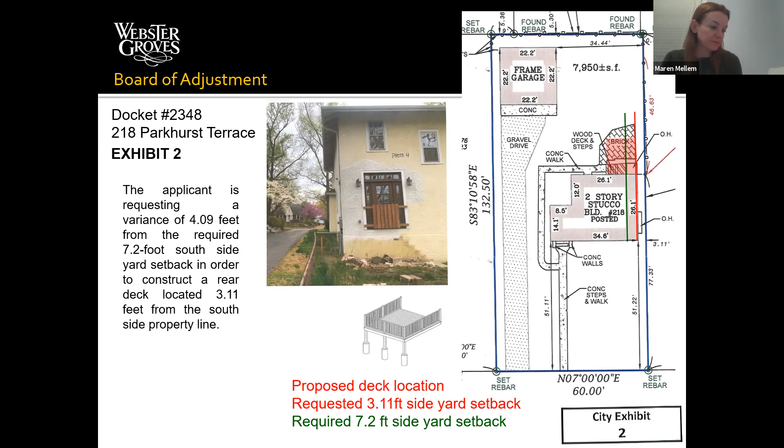Maren, would you poll the commission? Randy Sprague, aye. TJ Papillo, aye. Andrew Podhast, aye. Debi Salberg, aye. And Maren Mellem votes aye. Your application has been approved. You may see city staff during regular business hours about your next steps or options.

And with that, we move to the last docket, 2349. Would you please read this into the record, Maren? Yes, docket 2349, a petition submitted by Sean Finley on behalf of Timothy and Andrea Sampson for an application for a variance from section 53078N of the zoning code of the city of Webster Groves.

The applicant is requesting a variance of 2.18 feet from the required 5-foot north side yard setback in order to structurally alter an existing non-conforming accessory structure located 2.82 feet from the north side property line. This property is located at 50 North Bompard Avenue in the A4 7,500 square foot residence district.

Thank you. Does the city have a case? Yes, Madam Chairman. First, the city would move the introduction of evidence, exhibits 1 through 9, with the subparts that have previously been provided to the commission, and would offer the testimony from city staff. We will present the testimony of Mara Perry.

Would you please state your name for the record? Mara Perry. Are you employed by the city of Webster Groves? Yes, I am. And you are the Director of Planning and Development, is that correct? That is correct. What are your duties with the city of Webster Groves? To administer and execute zoning regulations.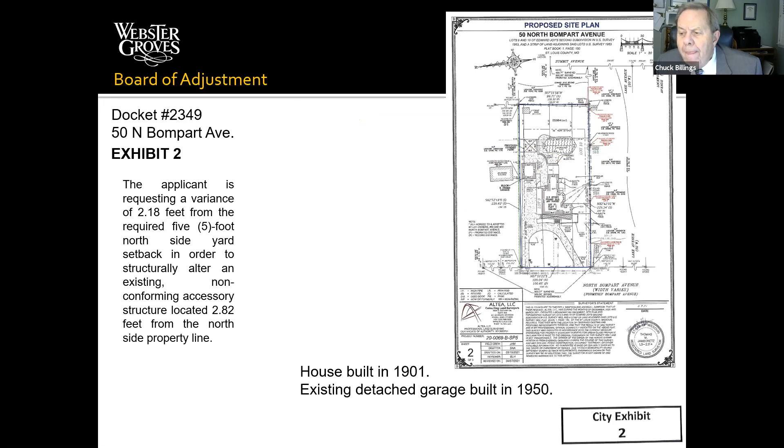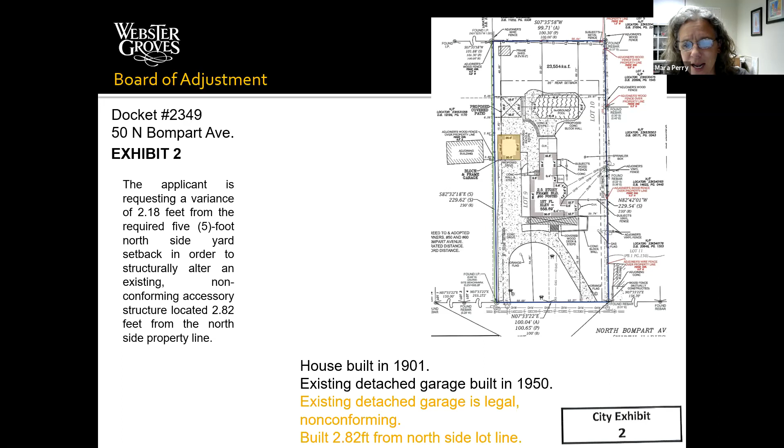And would you describe for the commission at this point the existing conditions on this property? Yes, this property has a house that was built in 1901 and the existing detached garage was built in 1950. The existing detached garage is a legal non-conforming structure. It was built at 2.82 feet from the north side lot line. You can see it outlined in yellow. These are photographs of both the existing house and the existing garage that's in the rear.

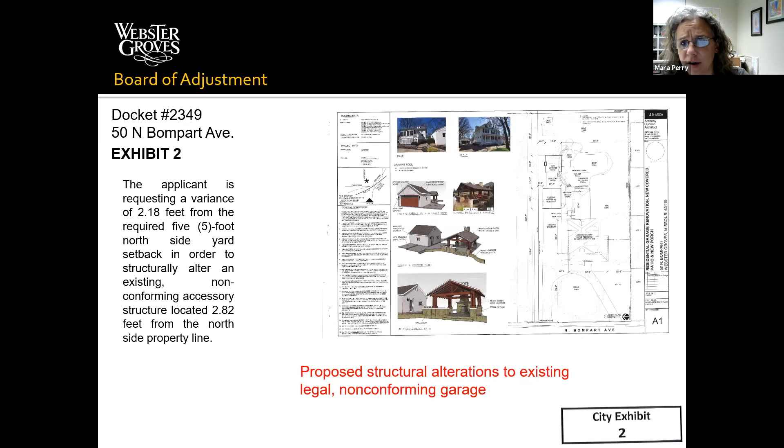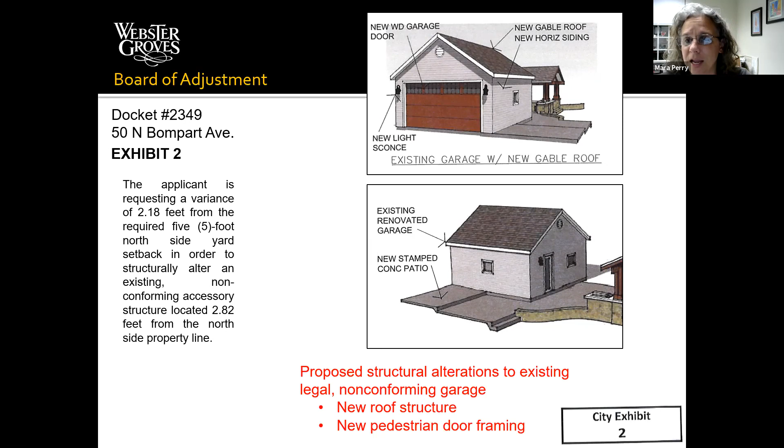What the applicant is intending to do is to take the existing garage structure and alter it, however, not move it any closer to the side property line than it already is. They are adding a new gable roof, which will structurally alter the roof structure, requiring it to meet current codes. There's also new pedestrian door framing being added, which structurally alters one of the walls of the existing structure. Both of those require them to come before you to get a variance for the rest of the garage space to remain in the exact location as it's currently located.

You can see here the green line with the required 5-foot side yard setback. The red line is the requested 2.82 foot side yard setback to alter that legal non-conforming garage.

Do you have any other exhibits in the city packet for the board to consider? No other exhibits at this time. You have explained the request and the applicable portions. At that point, Madam Chairman, the city would move the introduction of the exhibits and the testimony, and would have nothing further. Thank you. Does anyone have any questions for Mara before we ask the petitioner to speak? No.

Mara, I have one question real quick. I understand this is not what we're addressing here, but they are building a new covered patio, and that appears to be within the correct spacing away from the side. So that part of it is in compliance. We're strictly talking about the garage that was not in compliance and will not continue to be in compliance. You are correct. So they have two different projects going on, one completely within compliance and another they're trying to structurally alter. I understand. Thank you.

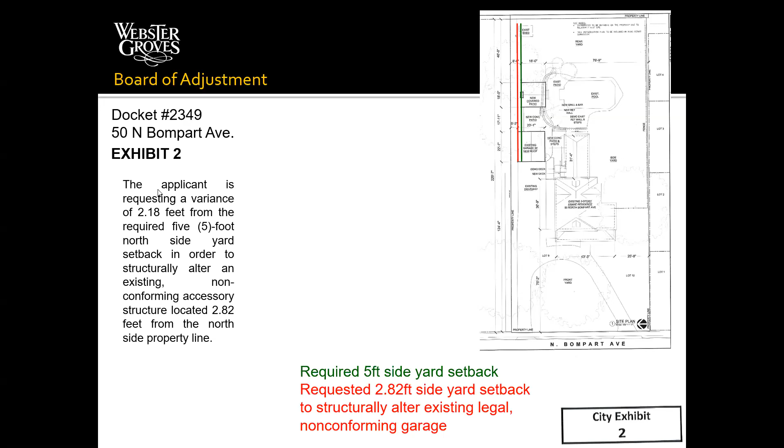Will it be big enough for 2 cars? Yes, it will. Okay. Does anyone else have any questions for Mr. Finley? Nope.

Are there any other witnesses in favor of docket 2349? No hands up at this time. Are there any parties in opposition to docket 2349? Also no hands. Okay, hearing none and seeing none, we'll close the public session and open this for board discussion.

Does anyone have any initial thoughts? My initial thought is this house is old and it sounds like it is being run down just out of age, not out of ill keep or anything. And it sounds like an undue hardship to me.

I'd also point out that we have the situation where the garage was built at this location, and they're attempting to reuse part of it, so it would seem to me that the hardship is the location of the existing garage. They didn't go into anything about if they'd remove this garage, the new concrete patio and steps, and how this would have to be modified. But I think this is a reasonable request as well.

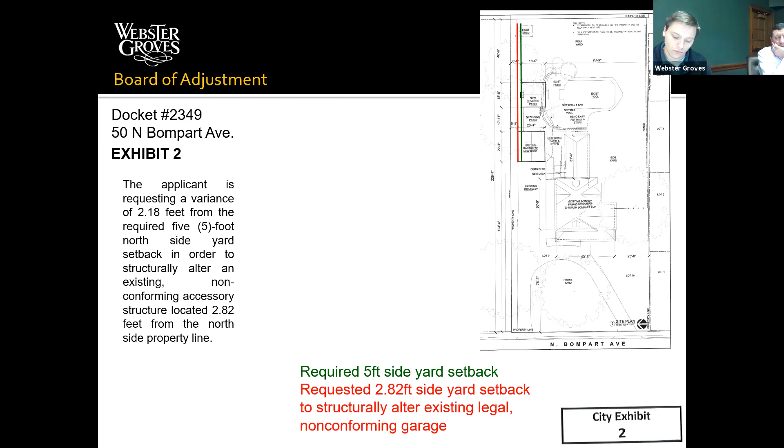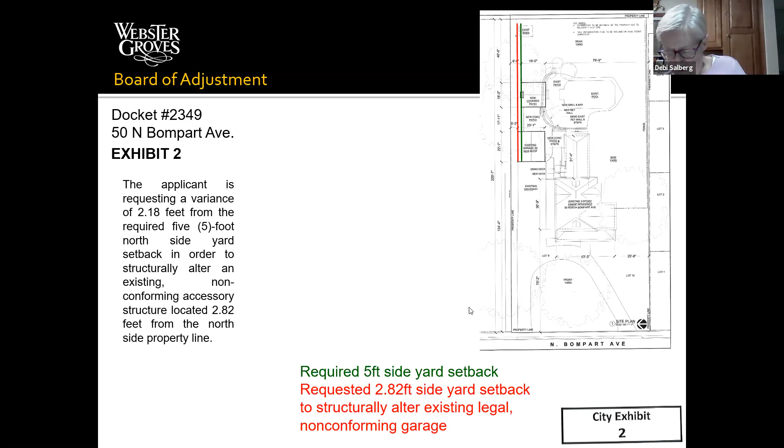All in favor, please say aye. Aye. Aye. All opposed, nay. Marion, would you poll the commission? Randy Sprague, aye. Debi Salberg, aye. Andrew Podest, aye. BJ Papillo, Maren Mellum, aye. Your application has passed. You may see city staff during regular business hours about your next step or options.